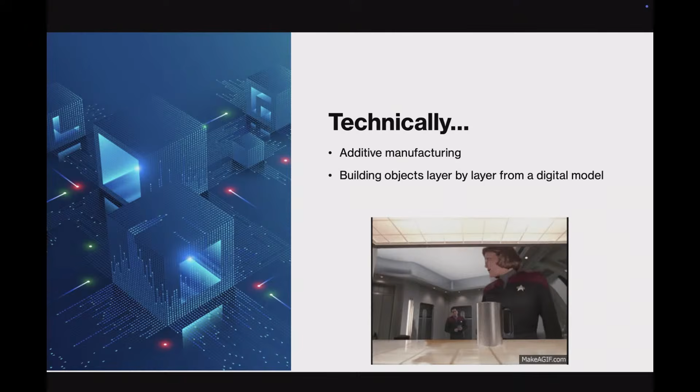I don't have the examples up here, but you can go look up NASA's plans for a pizza 3D printer. You can also look up a Kickstarter that succeeded, shipped to about 2,000 people back in 2013, for a pancake 3D printer. It would make whatever shapes you want on a hot bed, then flip it over and you've got a pancake, whatever complex shape you want.

So a couple of other terms I want you guys to familiarize yourselves with if you're not familiar: SLA, stereolithography, SLS, selective laser sintering, and FDM, fused deposition modeling.

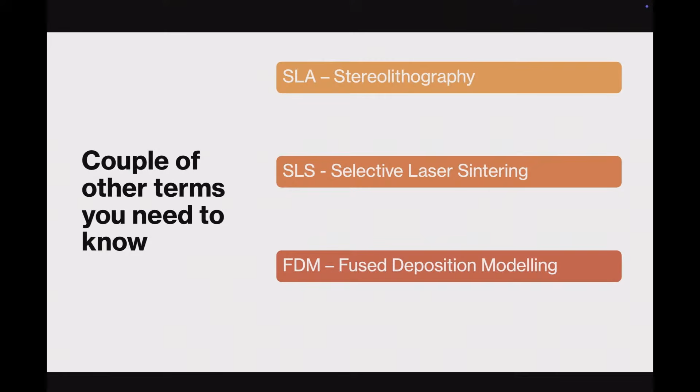Now I'm going to tell you the same thing I tell my students: in science we like to use fancy words. Stereolithography, three-dimensional light writing, literally translated from Latin.

Selective laser sintering is using lasers to selectively melt and fuse things. So stereolithography is when you use resin, liquid, and cure it into a solid using UV. The cheap way is to take a screen, put a black mask on it, only open up the mask where you want light to come through in the shape you want, shine UV, and you've got hardened stuff in that shape. The fancy way is to have a laser trace it. I don't have the money for one that actually traces lasers, so I only have the one that does the UV screen.

SLS is super fancy. You get a bed of powder, usually nylon. A laser goes through in 3 dimensions, reflected using a whole series of mirrors, and builds a 3D model inside that bed of nylon. You can do incredible things with it.

Is this out of a solid thing? No, imagine a giant vat filled with nylon powder, and you've got a laser going in with mirrors all around it, pushing the beam to exactly where it needs to go. It reaches focus at one particular point where it melts the nylon and hardens it. So there's a big block of solid stuff you're melting inside? No, it's powder. Laser it to make it. So how's a laser getting through the powder to melt the focused bit, not the outside bit? You get a top layer, but then it pushes another layer of powder over it.

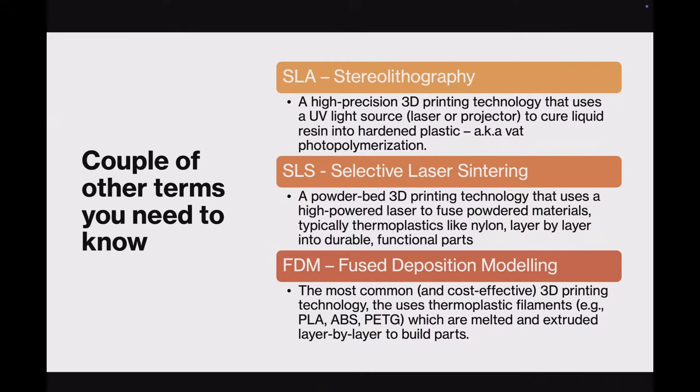And FDM, which is what everyone uses, melts a piece of plastic, a string of plastic, and draws lines with it.

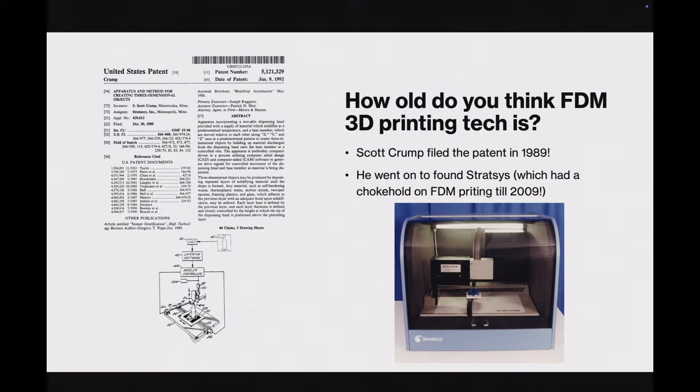So advanced, yet it's so far back in time. That patent didn't expire till 2009, which is why printers didn't turn up until then. While I was working on this presentation, I went to look at the history of 3D printing and realized I'd been in 3D printing from one year after the patent expired.

That made me feel old. So was there an explosion of 3D printers after? Absolute explosion. There's people waiting for that to expire just to go jump on it. So it's been held back all that time. You can blame Stratasys for it - well, they invented it, but didn't do much with it.

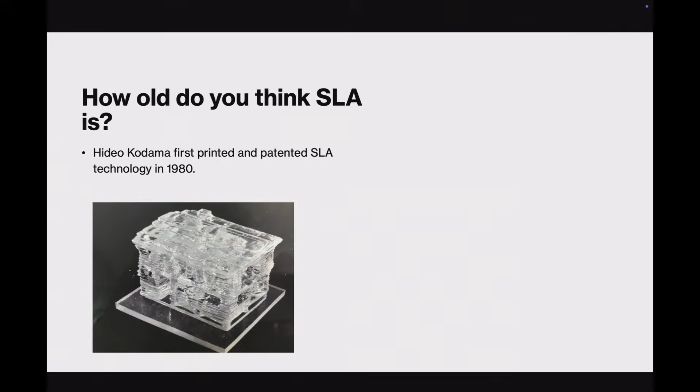Each of those layers is 2 millimeters thick. That is positively gigantic, just slapped it, just clear resin. 1984 was when Chuck Hull patented what we recognize today as SLA.

And once again, not much has changed. The reason being, all these patents expired fairly recently, so any changes have only happened in the last 15 years or so.

Since you just said after 2009, was there an explosion? Welcome to the first major Kickstarter for 3D printing.

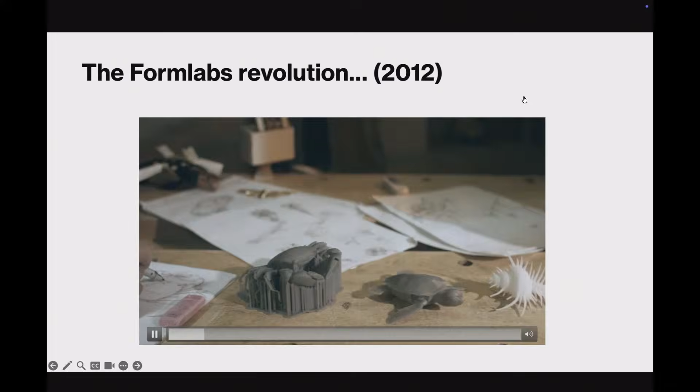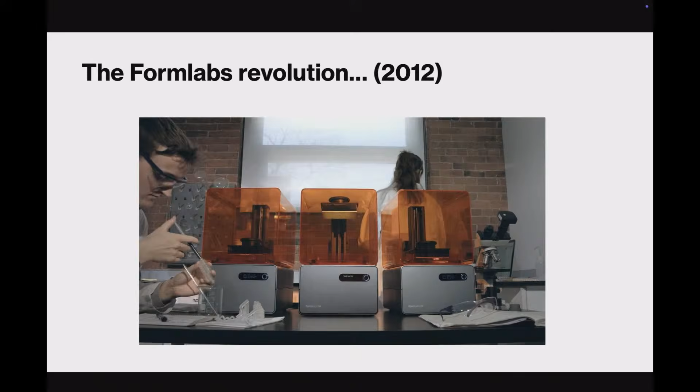All right, so you can see that was what the Formlabs one was about. You'll recognize the same shape here, just slightly different. They advertised clear resin, which we know now is painful to work with - it's much easier to work with boring grey resin. And actually nothing much has changed in what they talk about.

So you basically get a UV laser that gets reflected around. Like a laser printer? Yep, but in 3D.

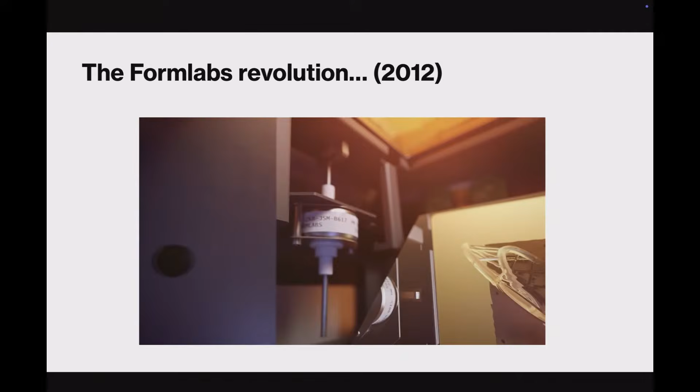And it punches through and hardens some resin. So Praj, where that's hardening the resin, it's not necessarily the surface of the resin bed, is it? The surface of the resin fluid, is it? Glad you asked, I've got show and tell.

That's your resin bed. That is what connects up to the vat here, looks like a mirror. That slowly pulls it, so that rises out of the resin.

The resin sits in there. Notice it's got that lovely clear thing down the bottom - it's called a FEP. The screen down the bottom has the mask and the UV light coming through. So that's just an LCD screen or something? That's just an LCD screen, yeah. The light source is UV.

That's about it. This basically drops in, once the first layer hardens it lifts up, goes back in, this time just 0.1 mm higher. And the next layer hardens, pulls out, goes back in, another 0.1 mm higher than previously. That's super cool. And the plastic down the bottom goes twang, twang with every peel because you're basically suctioning the thing off.

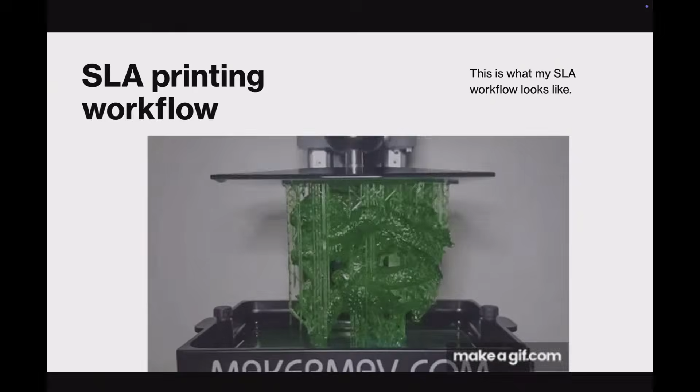Wow, that is basically how the printer works. Not that quick though - that's a time lapse.

Are there health issues with resin? We'll talk about that in a minute. I've actually got a friend and colleague stepping in for that, because the kind of 3D printing I do with resin is mostly artistic - I build models that sit on a shelf and I paint them. I'm a molecular biologist, I've learned.

I learned fine motor control skills to inject DNA into cells - don't do that anymore, so now I paint miniatures. But my colleague Rob, former colleague, will come in - he builds functional things out of resin, and I think that's super cool because resin's incredible when you do functional stuff with it. Now if you're wondering what on earth that sort of stuff coming off the model is, if you suspend something...

Where's my... oh no, that's all good.

He's got the book. Since we're in Tasmania, I thought I'd print a thylacine skull.

So this isn't going to attach itself to that? No, you have supports that are built onto the plate and the whole structure hangs off it. This is a failed print - you can see the back of the skull looks really weird. But there's a reason I brought it along, I'll talk about it in a minute. That's the support system the whole skull hangs off when you print.

So that's my current SLA printer, not this one. This was the printer I started with. I picked this one up in 2022 for the grand sum of 489 Australian dollars. In 2012 it was 3,600 US. In 2022, 489 Australian - you can pick this up for about 300 Australian when it goes on sale at the moment.

And it's actually a slightly better version that you pick up now, because this one they call the Mars Pro now. This one is a lot fancier, so I'll look at the difference.

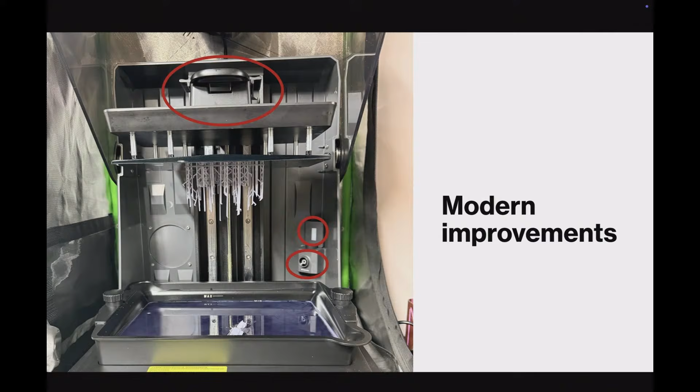Which causes problems because they cheaped out and put in a full spectrum white LED in there. UV cures resin, so you leave the light on for too long and you get a nice little skin of cured resin on top. Gotta be careful.

This one runs off a single rail, this one twin rails - a lot more stable. It's even got a little vent in the back to attach an exhaust fan to and suck all the fumes out because resin's nasty. Rob will talk more about it, but resin is nasty.

Now, one other thing is an absolute blessing - I want you to take a look at the state of that lid. That's from me picking up the lid every time I printed with gloves that had resin on them. That's now cured, I've hit it with UV so it's all hardened. But every time you take a print off, you've got to take the lid off, find some place to put it, and then deal with the mess. This one just tilts the lid back. Personally, that's my favorite improvement.

And then this is the coolest thing. Resin printing is chemistry - resins work best at a certain temperature. So I don't have the setup here, but what I used to do with this was a beer brewer's vat heater, the belt. Strap the belt around there, connect up one of those Inkbird thermocouples, that's what the Blu Tack was for. Put the lid on and it'd just turn on till the temperature got to 25 degrees - for the air temperature to get to 25, that'd be at 28, which is just perfect for printing.

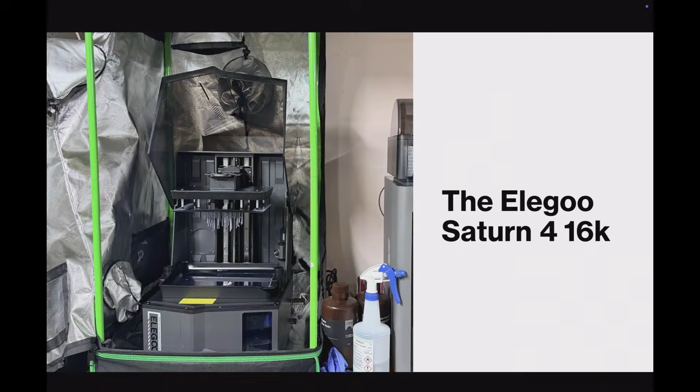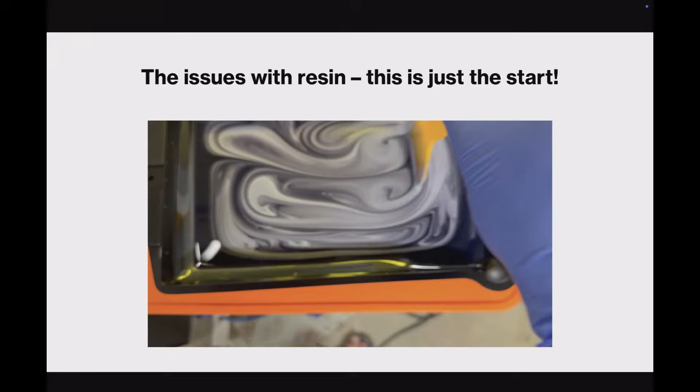So, once we move past the cool bits, here's a problem with resin. I left that sitting for a week in the vat - it separates. So you actually get in there and give it a nice stir. If it's this printer, my new fancy one does the mixing so I don't have to worry about it, this is just a demo. But resin separates in bottles too - if you don't give it a proper shake, you're going to end up with the compounds all over the place, which means your product's not going to be what you want it to be.

And then there's the mess of having to wash it after it comes out, and you've got to cure it. You need a silicone mat, because anything else will just absorb the resin. Resin can give you super detailed prints, but it's super messy.

Super, super messy. That, by the way, is the not-yet-assembled version of Sauron the Dark Lord. I was going to say Sauron's helmet. Yeah, reaching out, one ring glowing on the finger, mace in the other hand. Cool, gonna have to assemble it.

Now, I got that because I got it on sale. You don't need to get the fancy thing. You can literally get a Bunnings bucket, put a strip of UV LEDs inside, turn it on, put the thing inside, put the lid on, you're done. The wash station doesn't need to be that fancy either. Rob will talk to you about what he did - he doesn't have the fancy wash and cure station, and it works just as well.

Fair warning, I only work with pretty prints that I paint, so I use water washable resin. My life is a lot easier than Rob's - he's a miniature railway builder and leaves things outside, exposed to the elements, so he's got to use completely different techniques to work with it.

So what resin boils down to is: resin's messy, resin's toxic - I kid you not, an actual carcinogenic toxin - and resin's a pain to clean up. It's sticky, it leaves a mess behind.

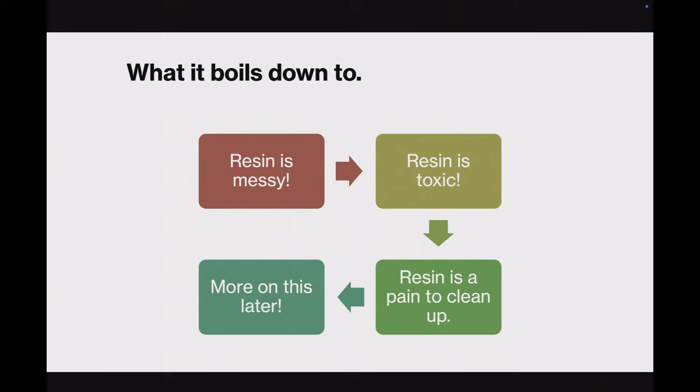Once it's solid, it's not toxic, is it? It isn't, but you've got to be very careful about making sure it's properly cured. In the early days of resin printing, I walked away with a print I thought was perfectly cured, left it sitting on a countertop, came back to it a week later - it liquefies. But we'll leave that to later.

Quick thing at SLS printing - once again, you're going to see another familiar name here. Space Launch System, just went to the moon. Design and manufacturing workflows are closer together than ever.

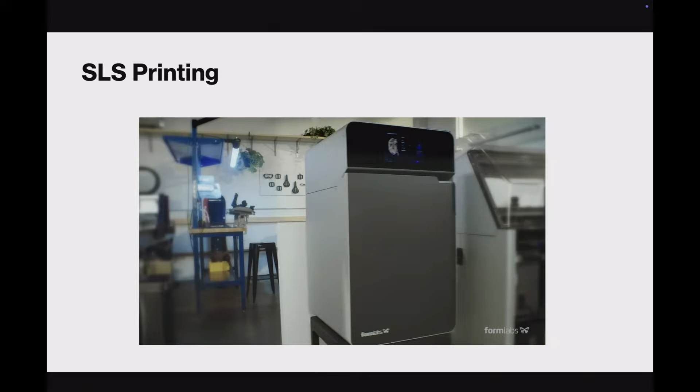But our ideas still often exceed what we can physically realize. A new wave of independent manufacturing starts now with the Fuse 1, an affordable, compact SLS 3D printer with an intuitive workflow. Selective laser sintering, or SLS 3D printing, is relied on for printing strong, functional nylon parts. In the past, SLS has been too expensive and difficult to use for many businesses. The Fuse 1 allows you to fabricate production-ready parts and high-performance prototypes, controlling your entire process from iterating on your first concept design to manufacturing finished products.

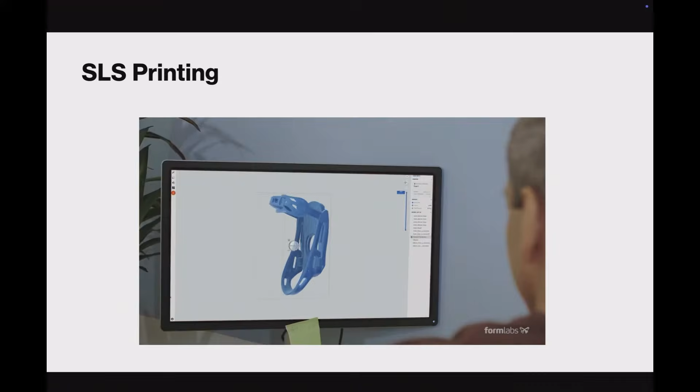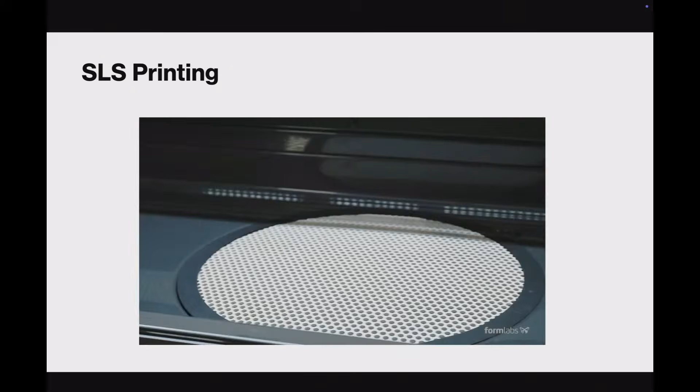The process starts in Preform, our print preparation software. Preform's part packing algorithms can automatically arrange many models in a build. During setup and printing, the Touch UI walks you through every step. Monitor your print from the touchscreen or from your computer via the integrated live camera. Once your print is complete, transfer the build chamber to the Fuse Sift - this safe, efficient powder recovery station completes the workflow. Fuse Sift will automatically dispense and mix used and new powder after you set the ratio.

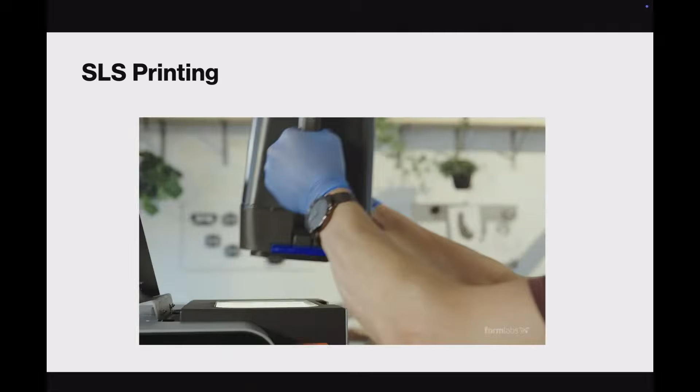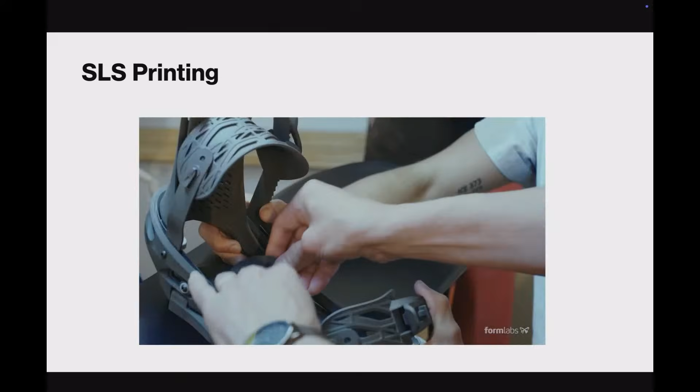Reduce waste by recycling powder at a 30% material refresh rate - this means you can print with up to 70% recycled powder. After you've transferred a completed build to Fuse Sift, swap out the entire build chamber from the Fuse 1 for non-stop printing. SLS 3D printing fuses nylon powder layer by layer. The unused powder supports the parts during printing, so you can create complex, interconnecting designs with no need for support structures. Nylon parts balance strength, flexibility, and detail, so prints are ready for rigorous functional testing or to ship ready-to-use products to customers. It's time to rethink product development and take control of your own manufacturing. The Fuse 1: Production SLS, finally within reach.

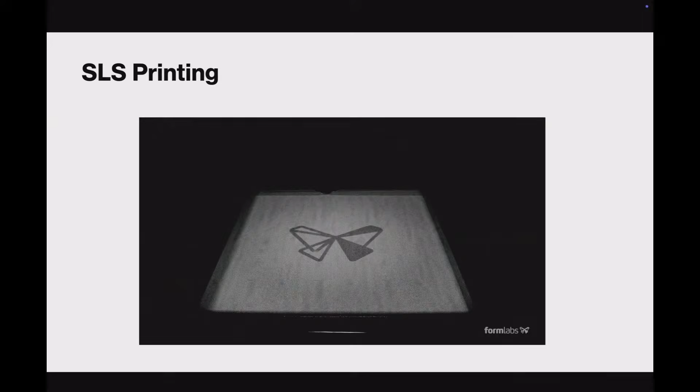You'll notice that at no point did they mention a cost. If you're going to ask, you can't afford it. I'll give you a clue: the nylon powder alone costs $100 a kilo.

Affordable SLS 3D printing is, if you want the entire package - the printer, the sifter, the reclaimer - about 140,000 US. That is cheap by what they used to be; they used to cost more. Can we put that on the committee for next year, please?

It's amazing how quick 3D printing is actually moving along. That's a standard FDM print - printers have just gotten that good. This is on a printer that was released in October last year. Looks like a handkerchief.

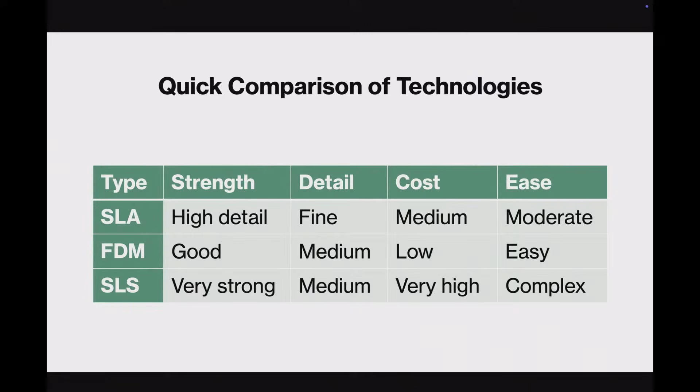Here's a fun little project I did to fool a whole heap of second year evolution students. I printed the bones at a quarter life size - the bones of a horse, a lizard, a bearded dragon's skull, and a set of bat wings, put them all together with their archaeological fossils, and put a little official nameplate calling it Ignis Fatuus, which literally means foolish flame. You'd be surprised at the number of second years who very carefully wrote the name down and moved along, thinking 'oh yes, here's a specimen we've looked up.' Feel free to check them out - that's really delicate bone, but it's printed.

I feel like that was echoes of what they thought happened with the platypus - yeah, they thought it was a fake. Oh my gosh, wow, what's it called? Ignis Fatuus - foolish flame. And the attention to detail on that scale too is absolutely magnificent.

So, AI now - I'm glad you said that because Rob is going to talk about that. That is amazing, it just gets scarier and scarier.

By the way guys, at the end of today's talk, the Tassie Devil skull that's floating around - well, crack it open, because that's from a CT scan, so the internal structure of the print is the internal structure of the actual skull. We 3D printed a wombat skull at one point at work, printed it out, looked at the teeth and went 'did the printer fail?' No, it turns out the wombat had poor teeth. Then we realized this is a CT scan of a living wombat running around in Lone Pine, so word got sent back saying your wombat's got dental problems.

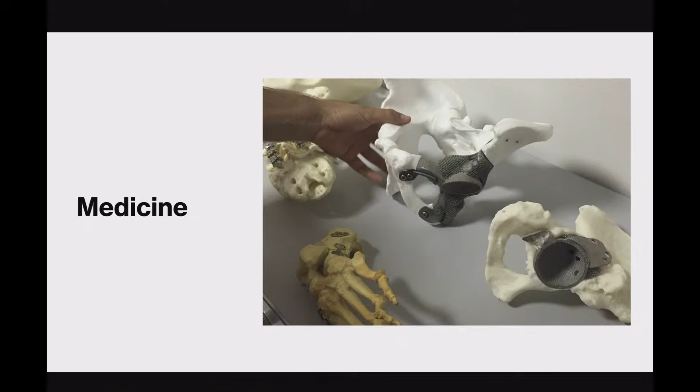And what's the printed surface like - is it such that you don't have to do anything to it? Yes, when I looked this up I found four papers published in the last year talking about making the titanium porous to let nerves, bone, and blood vessels grow through it. That's why it's not just a solid chunk of titanium.

You can print soft materials too - prosthetics, especially for soldiers who've lost body parts, maxillofacial replacements. You can rebuild a face from their facial scans. Amazing. Could they pick their own nose?

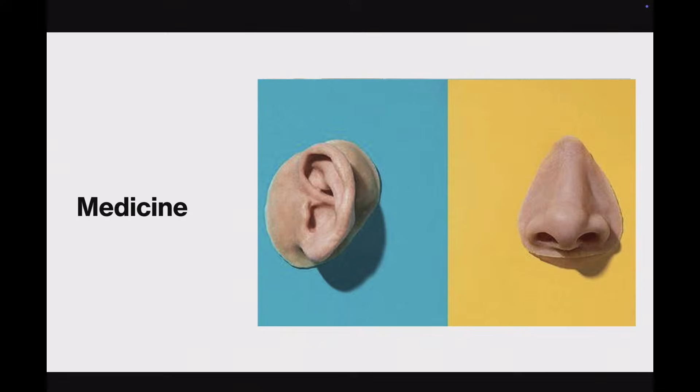And then I bumped into this paper, which is about what we think we'll be able to do in the future. It's a fascinating read - I'll put the link up on Discord.

3D printing organs is, from my understanding, about a decade away. As in, we can do that in the lab now - we can build lattices that build an organ around it. But just getting it to a position where you can actually implant those organs into people is the hard part.

What's the material they use? It's obviously some sort of organic material - usually an organic biodegradable plastic. Sometimes cellulose is used. My favourite is where they use sugar - they've spun heart structures out of sugar, 3D printed in sugar, and the heart muscles eat it. They create a lattice, put your cells in it, and it rebuilds a heart.

This isn't stem cell stuff. No - if you want stem cell stuff, there's a whole other thing happening out there with actually printing with cells, which is a completely different story. You actually layer cells.

That is amazing, and that's just medicine. We all know CSIRO invented Wi-Fi - yeah, CSIRO also made the first 3D printed jet engine back in 2015. Wow. That was on display at the Avalon Air Show.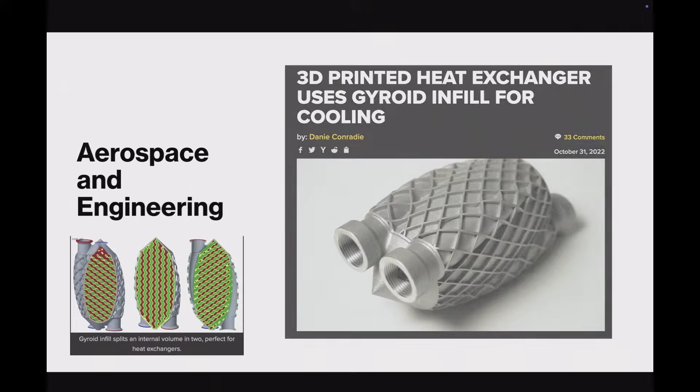The other cool thing is 3D printing ceramics. Oh wow, so now you're talking about materials that can tolerate excess of 3,000 degrees. Absolutely, so you put that into machine equipment that needs that kind of thermal tolerance. You 3D print it.

So Marcel, Ruby can try this out. Marcel's wife is a ceramics artist. Right, so sorry, I'm going to ask a question.

So how the heck do they print something at 3,000 degrees Celsius when lasers are hotter? You print with clay, you hit it with laser, and then you fire - you fire each layer. So it's literally you're basically printing with soft clay and then hardening it. You're firing it in a way that the clay isn't fully hardened up top, because the next layer should adhere to it.

And then there's material science. I had a good chuckle at the last talk I was listening to on YouTube, and I went, yeah, I'm going to have to talk about this. So, Justin, for the helmet, you can 3D print lattices.

Anyone here who's been in the armed forces? I can tell you that the foam in the helmets is horrendous, sweaty. It absorbs all your sweat, and then it sits heavier and heavier on there. You can 3D print a lattice that's been shown to be up to 10 times more efficient at reducing impact, while being hugely lighter. There's barely any material there - it's cooling and more breathable as well.

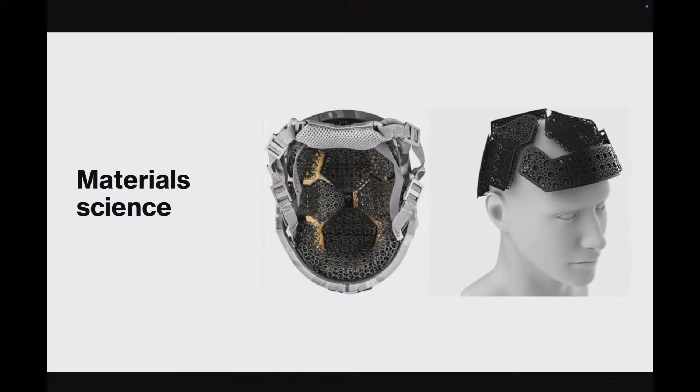I've got something better. For anyone who's got a 3D printer and doesn't have the money to buy one of those because you've spent your money on the 3D printer, that's available for make at home for free. I kid you not, it takes my body weight, works as a really good summer sandal. TPU again - sounds like a Michael Jordan type of thing. Prints in TPU, so it's actually dead cheap because a roll of TPU is $53, that's about a kilo. These weigh 83 grams each, so you just print another pair when you wear it out. And how hard wearing are they? Is it TPU? Like that's TPU.

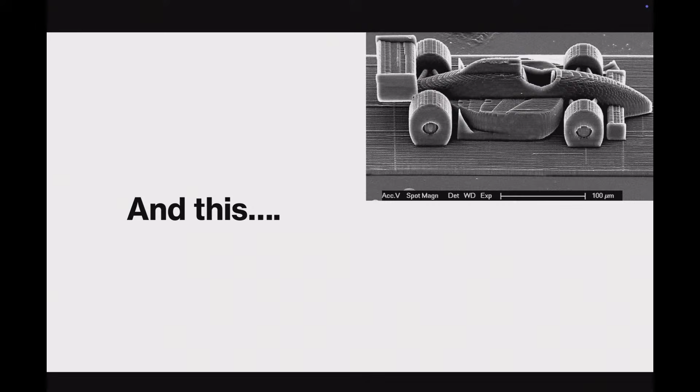So presumably that's under a scanning microscope, I'm guessing. So the reason I'm showing you guys this is the jet equipment materials that you print, the structures and apparatus you print - you can actually shape them at a micrometer scale to give you the highest efficiency, break up the wind coming, break up the turbulence.

I'm just happy, guys, that I can actually print and paint that at home. So that's come off the Saturn 6, you can see a few layers there.

Yeah, that's fantastic. Thanks. So Praj, how long did that take? How high is that, about that scale? And how long did it take to print? The entire thing, about 22 hours. Okay, and it's mostly hollow.

How much support structure was on that? Quite a bit, yes - look at the detail. Damn right. So the most interesting thing - do you have nightmares?

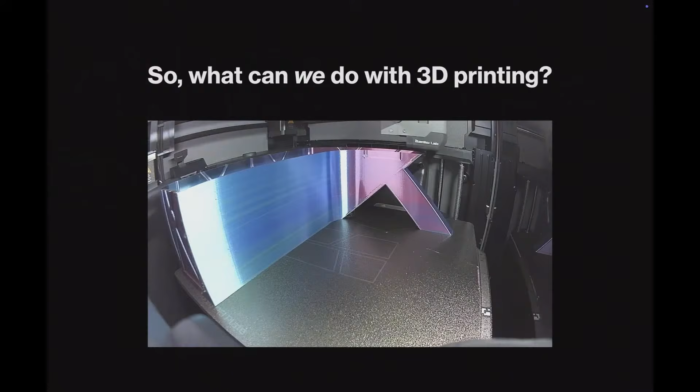I've got some weird things printed out at home. So that is all the stuff that fancy companies out there can do. That's what my printer at home can do with 3D printing. And you'll notice that there's not a support in sight.

45-degree angle. By the way, if you're wondering what that is, this little thing back here is what's called a poop chute for that printer. It pushes any waste filament out through the back, but the company, in a cost-saving measure, didn't provide a way to catch something coming out of that poop chute - it just pushes it straight out onto the table. So this opening goes in behind that, and it catches it, wraps it around the printer, brings it forward so I can pick up the stuff.

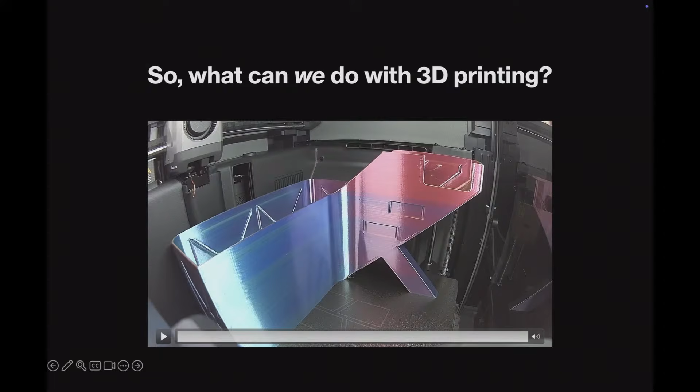I love it. Praj, I noticed there was a Bambu Lab thing - what model Bambu was that one? P2S. So, a very short history of 3D printing, guys, because I'll be switching to Rob in a minute.

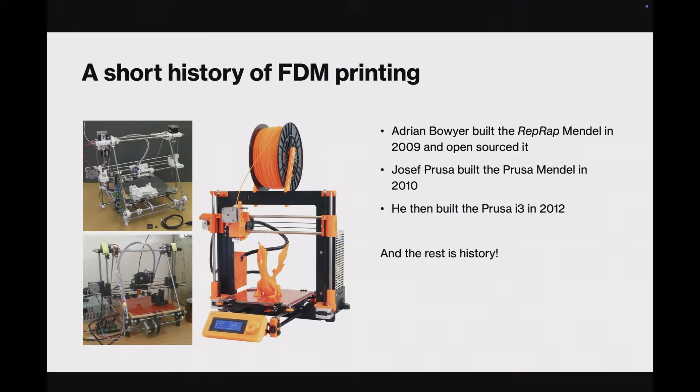That was the first FDM machine that came out after the patents lapsed. And then Josef Prusa went and built the Prusa Mendel, which Rob is going to show you because he's got an original Prusa Mendel. And then he built the i3, which became history. Now, in terms of my personal history, my history with 3D printing started there.

Great idea, terribly executed, because the beds were not level. Like a lot of Kickstarters.

Then I got a FlashForge Creator Pro in 2016. In between that, I was playing around in the Brisbane hackerspace with a whole heap of Mendels. This was my workhorse for many years. It has two extruders, so it can print two different materials.

Here's a failed print from that. You can see the support structure is white PLA, and the actual material is wood. It's wood filament, so I can polish that up, stain it, do whatever I want.

That's amazing. Wood. Yeah.

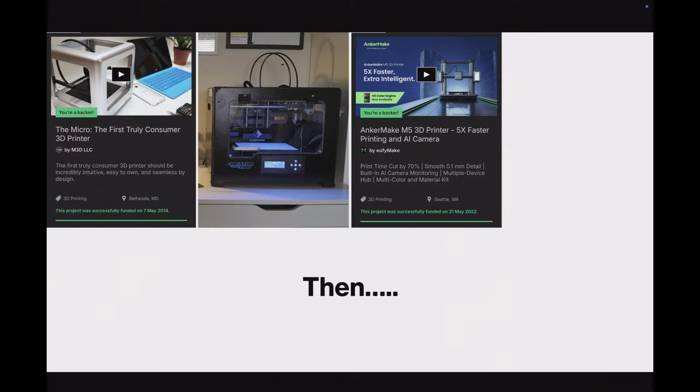So, fun story, Justin. When we started talking, I sent you those pictures of prints saying I'm starting to print. This thing, I turned it on, typed a few commands in, and it went thermal runaway. Okay, what do I do? I've been talking to Kiri about this for about a year before that, going, I'm not sure how long this printer is going to last, and I'm not sure if I can get a replacement.

Well, she was okay with me going and buying the Bambu Labs P2S. Now, for the first time, I've got a printer that actively swaps filaments, prints in different colors, embeds things, does super cool stuff. And as someone who started working with Mendels, where every nut and bolt had to be tightened to make sure your first layer is perfectly flat - we'll talk about that more.

This thing, I plugged in, I turned on, it leveled itself - 128 points of leveling. It then ran a sound check to see how the motors sounded in the space, retuned its motors so it didn't sound too bad. Then ran a vibration check, because when it does squiggly prints, it vibrates super fast. Now it has a compensation algorithm that it's built for itself because it's sitting on a slightly wobbly table.

And I'm going, I don't feel like I'm 3D printing anymore - I'm pushing a button and it works. And I assume all those filament rolls are in a heated enclosure - they're in a heated thing. The things up here are 3D printed, they're filled with silica gel. I've got a hygrometer there.

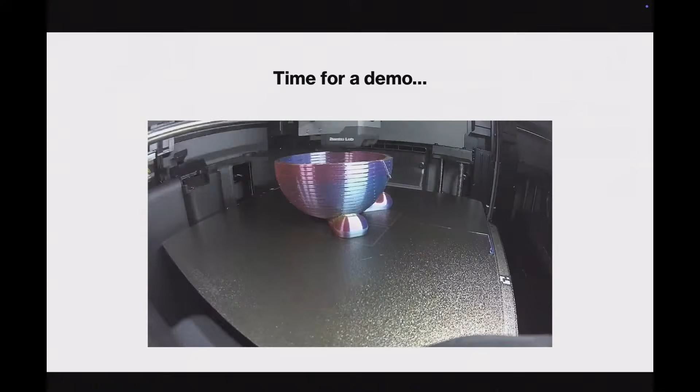I printed this - I didn't bring it, it was too big. I'm going to use it with my students. It's a giant Easter bunny. But it should be a bilby. Should have been a bilby. I agree, couldn't find one.

Very shiny chocolate. So, this brings me to - I was looking at the 3D printing channel on Discord. Lisa was asking for a modified print that would actually fit the battery that she's got. So I went, okay, let's try this.

I'll wait for the bunny's ears to finish. What's the time duration of this? Right, that was a 17-hour print. Because that is a free spiral, you can actually pull it open.

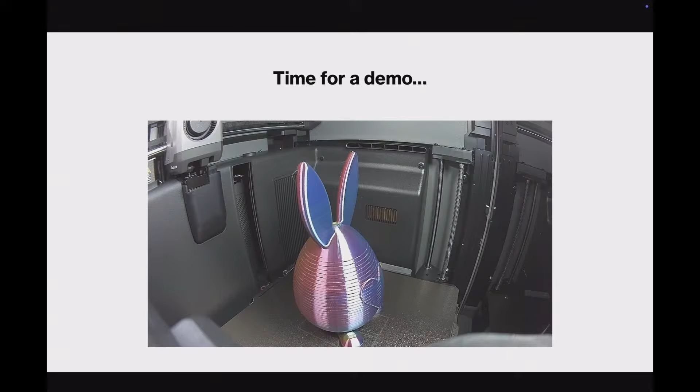So let's go to demo mode. I downloaded the file that Lisa pointed out - hang on a second, there we go, 3D printing. Let's go back. That was the one. I pulled it down, and she'd said that the battery was a 6066 - 60 millimeters by 66. So pick it up.

That's the thing. Now, guys, fiddling with an STL and trying to reshape it is painful - it's easier to do it from scratch. When I showed what I was doing to Rob, he went, 'Oh, I'll spin this one up in Tinkercad.' So he'll talk to you about that in a minute.

But if your files have a .f3d extension - how many of you here are connected to a university in one way, shape, or form? Yeah, you have a .edu.au license email.

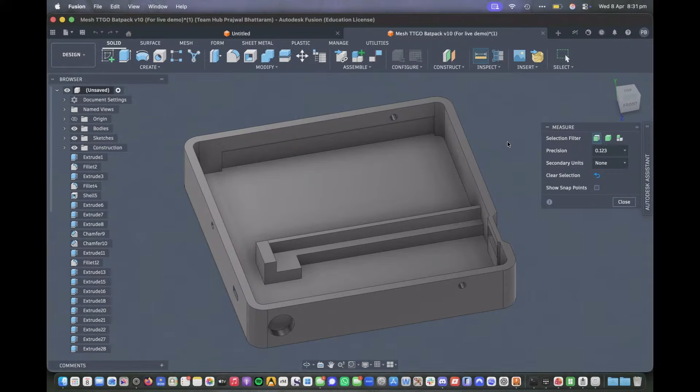So if we go the other way and look at the depth there, that happens to be only 351, so 35.1 mil. We need that to get up to 66.

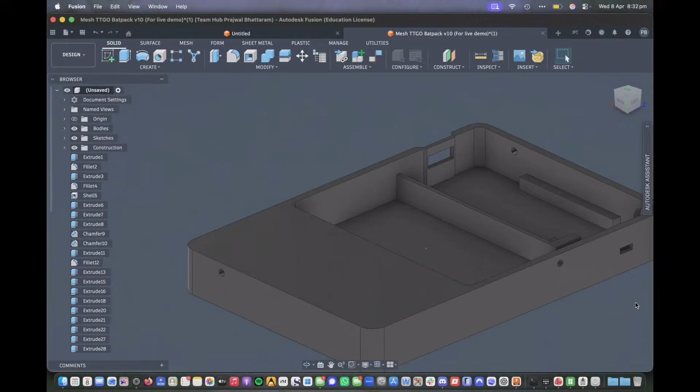So what I'm going to do, very simply, this is the cool thing: I select the face, right-click it, and move the face. I grab the arrow that points in that plane, pull it out, and tell it, because we're going from 351 to 660, I'd like it to go up by 315 mil, give or take a millimeter. So suddenly I've got a very big chin on the thing.

Here's another cool trick. Because that's a recess, I can grab that, tell it to extrude. Extrude literally means take a 2D shape, pull it up to be 3D, but it also means take a 2D shape and punch it in to be 3D. So I can grab that arrow and tell it to go in -315.

I've got my slot. Then I'm going to grab that, ask it to move. It's just a flat face, not an embedded thing. I'm going to grab that arrow again, so I get that, and then go -315.

We're done. Lisa, this is why I said it, don't need to worry about it. That's how quick it was to modify it. You made that look too easy.

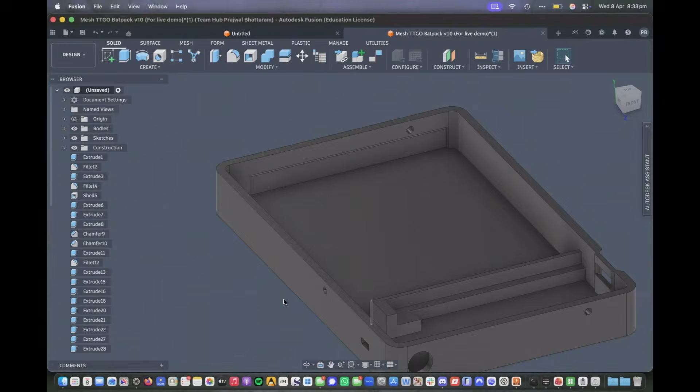So once you've got this, all you do is go File, go to 3D Print, not to export. Sounds logical to say export, but nope, 3D Print. You've got to divide it by 10, don't you? I'll show you that in a second. Grab the object, say OK.

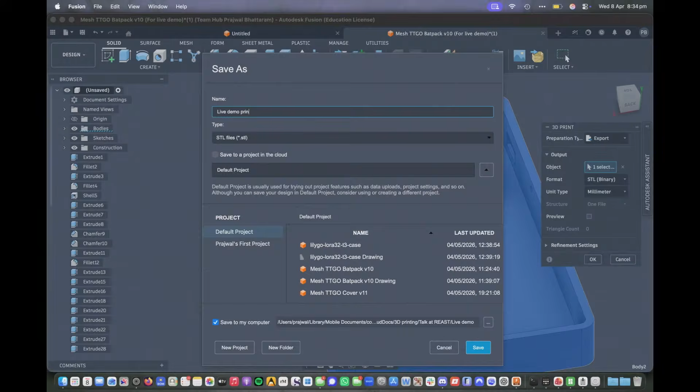I'm going to pop it in the same folder as the other one, which is... where did I put it now? Oh, 3D printing, there we go. Look at Reast, live demo, and I'm going to call it live demo print. There's a reason I'm calling it live demo print. Okay, that's done, we can close Fusion.

Now, that's about as easy as it gets. Keep poking around with it. If something breaks, Command Z, Control Z, it'll fix the issue for you.

Now, once you've got that, I'm going to fire up my slicer. By the way, guys, I've got Tailscale installed at home, so give it a second, it will link through. There's my printer in Brisbane.

Right, so I'm going to pop into the prepare mode where I've set it up, with its poo shoot. Thanks, Greg. Poo somewhere, Greg. Yeah, 3D printed, custom made poo shoot.

Poo somewhere. As you pointed out, as soon as I drop that on the bed, that bed is 256. Yeah, print that, go for it. Hit go.

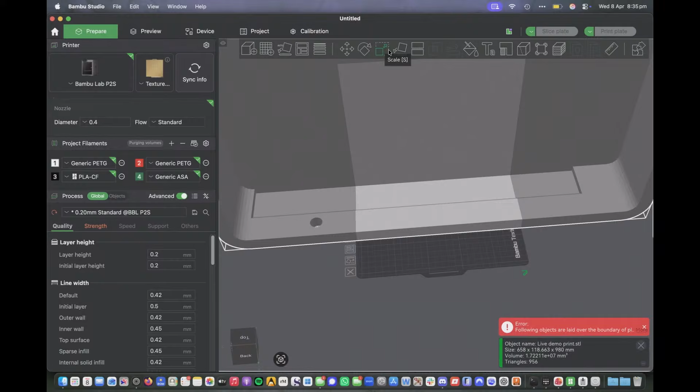Houston, we have a problem. Watch the filament go, I love the error. It's too big, you think? You select that, you scale it, and because it's a factor of 10, I'm not even going to bother with the 100, I'm just going to take out the decimal point and move it one step, and suddenly we're back down to size.

Okay, now with this one, what I'm going to do is tell it I want it flat on its back, because if I flip it the other way around, this section's going to print on thin air, not what we want. We're going to set that up.

Hey, look, it's got my filament set up with colors. So are you slicing now? I am, I'm going to show you how it works. So I'm going to tell this thing that I would like it to print in a filament called... nah, I want carbon fiber. I'll print in carbon fiber. Oh wow. So I'm going to tell it to print using carbon fiber, the PLA infused with carbon fiber. This is where it gets cool.

So for quality, you can set your layer height. The finer your layer height, the longer it takes to print, but the cleaner your print looks. There are tricks to fix that, but most of these I tend to leave as they are. The only thing I would change if I were making a pretty print is the seam.

A circle has to start somewhere. It usually lines them all up, so you get this little nubby section where the seam of the print is - that's when it's aligned. I could randomize it so for each layer I'd get a different seam point, but it just takes longer. Given that this is a functional print, that's all good.

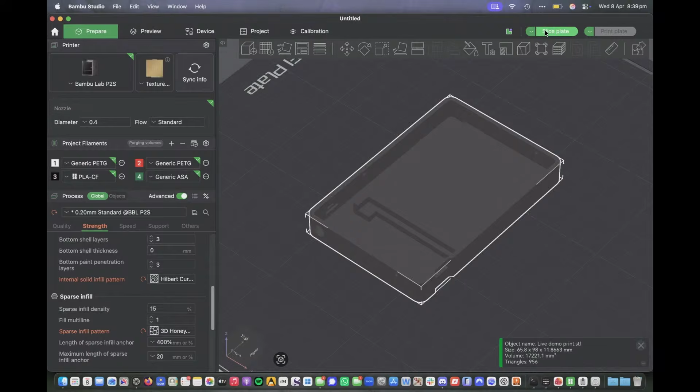So I'm going to put that in there. I'm going to tell it to slice the plate. Slice the plate - what has it done?

So inside that empty box, can you see the bottom layer? It's actually a cross hatch, it's not straight lines anymore. So it's going to print that first.

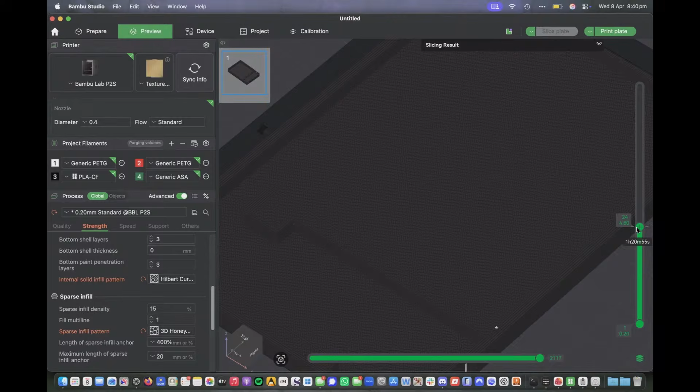And then it's going to start printing layers over it. Would that take a lot longer than straight lines? It does. And the walls are straight lines though - is that only for one layer, or 0.2 millimeters? 0.2, yeah. The double line. So it prints it all the way up, finishes off the top of the wall with the same sort of print.

Now this is where the magic happens. I hit print, and I'm telling it send it - off it goes through the cloud.

Print is on - is that a fork of it? He's going to pull one out from his bag, basically identical to mine. He's going to magically transport it from there to here - because he didn't save the file. He doesn't save it. It's printing.

Oh, there you go. Watch the print head - it's cooling the chamber, it's moving the plate around. Wow, it's actually homing itself, figuring out where it is in space.

It's doing its calibration. Does it run through a bed level as well before it starts? It will do a bed level in a minute. Do you have any problems with the model adhering to the plate? Not with that plate - we'll talk about that.

We have all sorts of issues at the shed - Rob's going to talk about masking tape. Did you put in a colour request, Lisa? You're getting black - carbon fibre. Any colour as long as it's black.

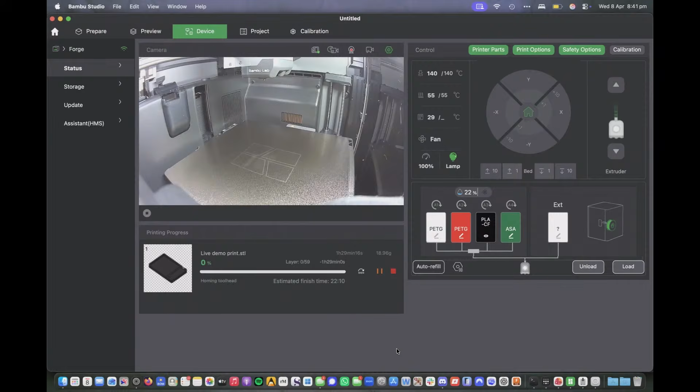Praj, two questions for you. Because this is clearly a functional print for amateur radio, not one of your complex models - how long would you expect this print to take? And the second part of my question: we're watching it getting itself all warmed up and levelling and self-checking at the moment - how long before we expect to see the first layer go down?

7 minutes to the first layer, 1 hour 29 minutes to the whole print being done. Okay, and that's because it's not necessarily as complex as those models that you have. Okay, all right, thank you.

I'm not going to make us sit and watch for 7 minutes - I'll come back to this in a minute. But you can see it's using the poop chute.

It's because he's very proud of his poop chute - it's the first printer I've had that actually does that. You can see it pulling the carbon fiber filament through. Mine does it down the side, as a side entry too. Mine just does it wherever it wants.

All right, while it does its thing, I'm going to start by calling Rob because he's been waiting patiently and I've been blathering away here. It'll take about an hour, and about another 3 weeks till you go back up there and post it back down.

Yeah, well there you go - it's basically flicked the bits off. It's changing the filament across. I'll call Rob in the meantime.

In the old days you had to do all this manually - that's why, like I was telling you last week, it's so much better now. You don't have to do any of this old crap. Some of us still do. The old days - 4 weeks ago. Yeah, that's true too. Hold that thought.

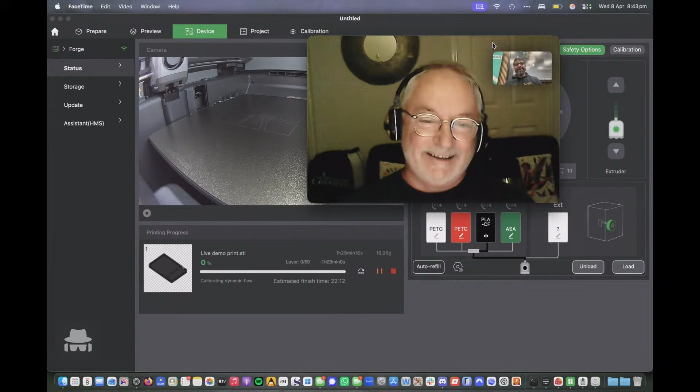All right guys, this is Rob Mackay-Wood. He used to be my boss back at UQ. He's a fellow tinkerer, fellow biologist - he's done firsts of so many things. He hasn't gotten into radio yet, I haven't convinced him to do that yet. We've got a deal for him - we'll set him up with a Baofeng, easy, peanuts. But Rob's been tinkering and building things for a very long time.

E-learning at Sydney Uni - he was one of the people who helped build it, crawling around in spaces running cabling through to get systems to work. Then he came up to Uni of Queensland. I started working as part of his team about a year after he started. At some point I said to him, Rob, if you retire, I'm going to quit. And he retired, and then I quit, and now I'm a school teacher.

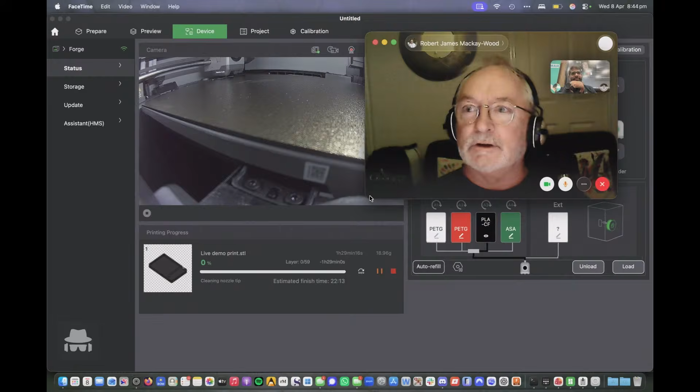I'm a biologist and manager, retired from UQ, UCID, and from Cornell, and I'm an IT nerd like Praj. I self-taught - my first computer was a 1 megabyte Mac, 1986, and it was the top of the range, $5,000. As Praj said, I was an early adopter of the internet, and I actually used Photoshop 1.0.

And I used to build networks around our building. We ran wires from the basement up to the labs on level 4, and then up to the teaching space on level 7 - we snuck them around everywhere.

I'm a lover of all things sciencey, a bit of a tinkerer, I love fixing broken things. One of my other hobbies is fixing old steam engines - toy steam engines. I taught myself how to use a metal lathe, and some of my steam engines are over 100 years old.

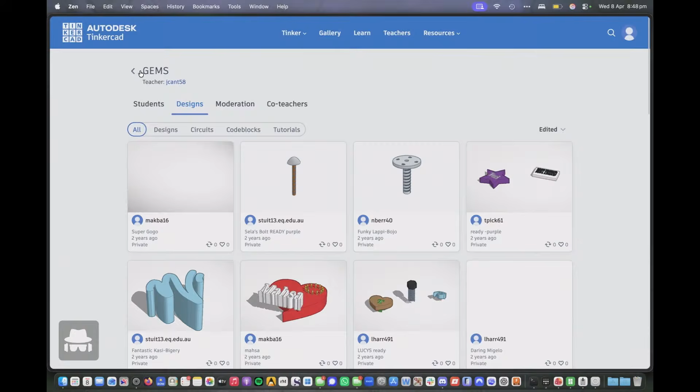And you can do some amazing things on Tinkercad. Now, just to give you a general idea of what you can do in Tinkercad and what you need to think about, got a cube up there.

Now, in this cube, I'm going to pull this out of the way. I'm actually going to delete them so we can restart. That's a cube. I've literally just grabbed the cube, selected the cube. If I want to know the height, I click on that.

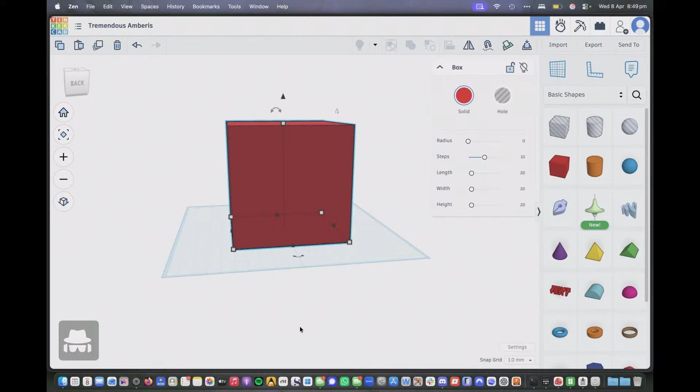Oh no, I'm lifting it off the print bed. No, that's not what I want to do. That is 20 millimeters across, 20 millimeters deep. And if I spin it around, it should tell me. You can tell I'm not very familiar with Tinkercad. You can actually go, yep, that's 20 millimeters high.

With 3D design, the way you think about design is addition and subtraction. That is a cube, a solid cube, 20 by 20 by 20. I grab a solid hole. This will make sense. There's a hole, I pop it in there.

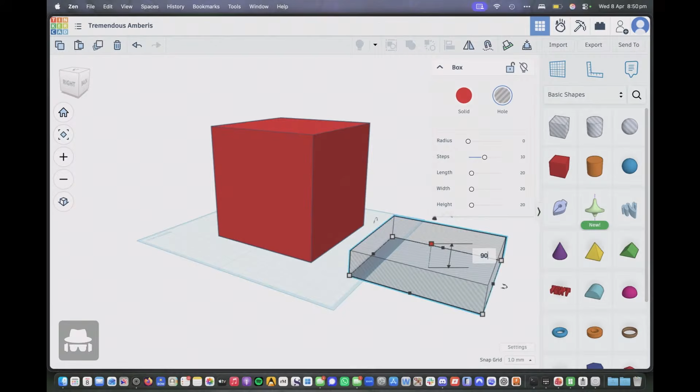Now let's say I want to make that a hollow cube that's got 10 mil thick pillars on each side. I literally just go 90. Make them 5 mil, won't it? And I've basically got something that's 5 mil on each side. Now, to get it off the floor, I can grab that arrow and pull it up 5 mil.

Now, given I said I'm going to do something that's 10 mil, I'm going to change the size very quickly, make it 80 by 80 by 80.

Now, if I pop that in there, there's no way I can see it. I don't know that it's in there. Make my life easier, I'm going to make one side 120. So I'm going to slide that through. And then I'm going to lift it 10 mil off the bed.

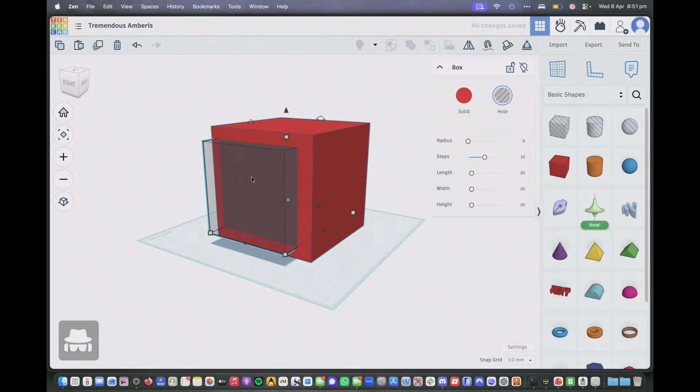I'm going to copy that, paste it, spin it around 90 degrees, basically go minus 90, push it through. Now I'm being very approximate here. Grab the same thing. This time I'm going to spin it 90 degrees the other way. Come on. There we go. And pop it in there.

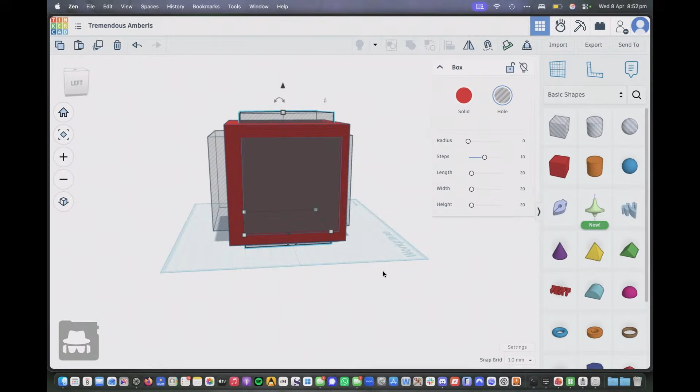This one is going to have to go through a little deeper. Just make sure that whatever you're doing is actually centered. Select everything, group. I just sort of eyeballed it, so I actually ended up missing a bit at the back. You can see I've cut the back off. But it's literally me just inserting shapes into shapes and subtracting a hole from it. It's positive and negative space.

That's about it. You want to build a wheel and an axle?

So I have a question just specifically about Tinkercad, because the last time I did an engineering drawing was 30 years ago, and there was a grey lead pencil and more erasers. Yep, lots of erasers. In fact, lots of erasers. For someone if was going to venture down this rabbit hole, and I know AutoCAD's very, very complex but also very powerful, would Tinkercad be a good starting point?

It is, and I'm really glad you asked that question, because I'm going to flip back to Rob, who has done that exact thing. He started playing around with Tinkercad. I've shown you a very rough, I'm not a 3D designer, guys, I'm putting it out there. Rob is. Okay, Rob, all yours. Okay, have you got me back again? I've shown you. Yes. Okay, so Praj, you're a real noob on that. Yep, I know.

Could do better, just laying out the inside. That's why I've got him up there. C minus, would not recommend. That was a bit harsh. Oh no, I'm not a designer, I'm the first person to say that, I'm not a 3D designer. Oh no, you know Fusion. Yeah, and that gave me a pain in the brain, so I much prefer Tinkercad.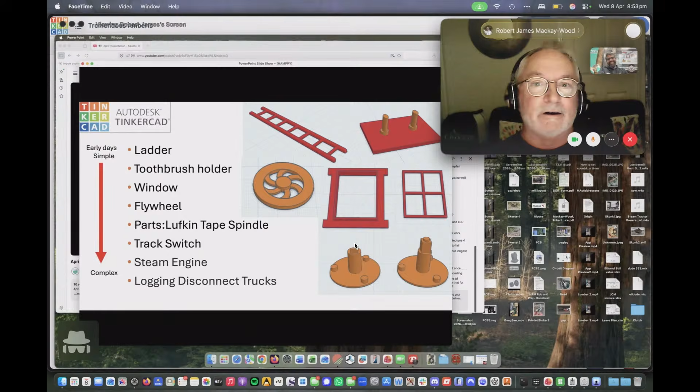One of the first things I ever built was this ladder, for a friend who had a model railway. The next thing was this toothbrush holder for my toothbrushes. I also built buildings on the railway, so I made a window, and I've also made flywheels.

The other thing I was doing at work was making parts for some of our equipment. This item on the bottom right is actually out of a Lufkin tape measure, and it kept breaking when students used to wind it crazily and whack it. So I started printing those up, and because the tapes were about $80 each and that was about 50 cents worth of resin, I did that on a resin printer.

The next few items you'll see in my list are a track switch, a steam engine, and a logging disconnect truck. They are complicated. This is a switching mechanism, and I've got two versions, one for filament and one for resin. The filament one is very basic, printed on a flatbed, so these items are printed on the flat, whereas on the resin one they're mounted upright. This is the mechanism here - it moves backwards and forwards and moves the track.

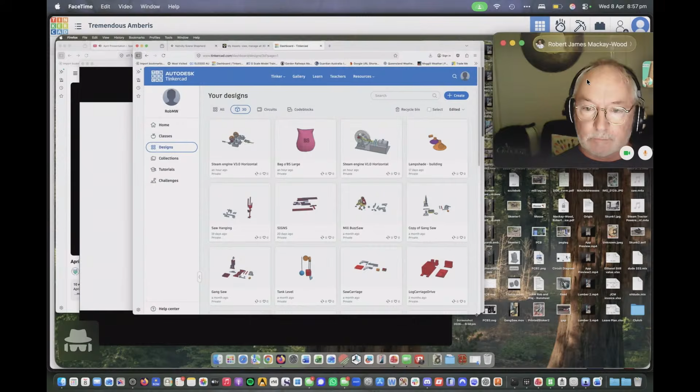So that's pretty much Tinkercad. I'll just flick over to here - these are some of my Tinkercad designs, I've now got 185 of them, all under Autodesk Tinkercad. One thing I'm really worried about is them disappearing one day - I hope that's never going to happen. But yeah, I've got a pile of things on here that I just keep for myself, I don't really sell them for anything.

So pretty much, I think Praj, you're up next again. Yep, thanks Rob. Question - steam engines, did they work? Compressed air? No, but I could. It could work. Thank you.

There's another way of doing this that will actually let you go from 3D printing to working models - we'll come to that in a second. Yeah, it is possible. These were designed, the second one, for my animated lumber mill - that's why I've got holes for bearings in there, and these things will go backwards and forwards, but I don't have pistons, it's just all faked at the moment. But anything's possible in 3D printing.

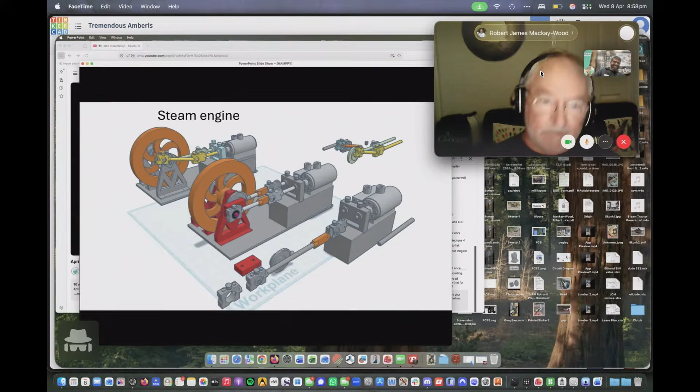One of the other things we were going to talk about is Thingiverse - have you all heard of Thingiverse? Okay, so some of the things that I also sell are these little guys, I'm just going to pull one out of my cupboard. This dude came from Thingiverse, the guy on the left - as you can see he doesn't have a hat and he's also got one leg up. So in Tinkercad, what I did, I chopped one of his legs off, copied the other one, flipped it horizontally, and now he's got 2 legs and he's sitting down.

He's a bit of a lazy bugger, always sitting down - council worker. Oh, he'll be sitting down also. I made him fat and a thin one, because they look a little bit better when they're fatter. Maybe a bit like me.

So yeah, these are some of the things that I like on Thingiverse. This is my collection, mostly figures at the moment. But I'll talk about these guys later because these are AI.

Is everything on Thingiverse free, or do some people sell? It's the license on them - you'll have to look at the license on each item. Yeah, most of them are free.

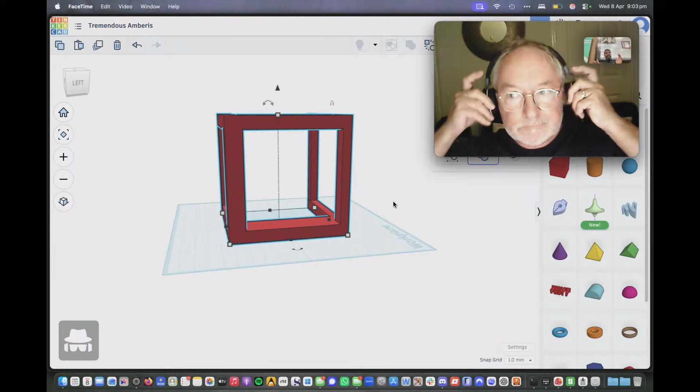Are your kids changing the nozzles to print this carbon fibre stuff? We're just using hardened steel. For everything? Yeah, yeah, right, okay.

So I'm going to pass it back to Rob because he can tell you about how they survive, especially given we're all amateur radio operators - we need something that can survive outdoors. Rob's a specialist at that.

Oh, we lost him. Rob, we've lost you. No sound, no sound. Okay, that better?

Yeah, that's better. As Praj mentioned, a lot of my stuff I build for outside. I started with PLA and it lasted about a couple of weeks. I used that when I was doing the FDM printing as prototyping because it's a lot cheaper than ABS and the settings are a lot cooler.

One of the things Praj and I were talking about this afternoon is you've got to treat your materials with care, because I've got this little example here - I've got a whole reel of black PLA and it just breaks. Yeah, got one here too, same thing.

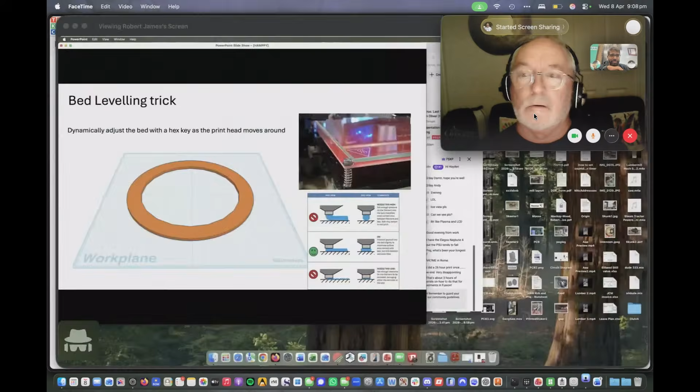Yeah, one of the little tricks I found for you guys is to use a circle when you're leveling your bed. I'm not as lucky as Praj, I don't have an auto leveling printer, so it's all manual. This little screw here, I have to adjust as it's printing. And with the humidity up here in Queensland, my printer is made of plywood. It tends to expand a little bit and contract, so I sometimes have to level the bed maybe once or twice a week.

So as I'm printing the circle, I'm watching how it's depositing the filament. On the top one, it's too high. The bottom one is too low. And you'll actually hear your print head going in a ratchet mode, trying to force the filament through the print head, and it doesn't like it - it goes da-da-da-da-da-da-da. The middle one is what you're aiming for, a little bit of spread from the nozzle tip. You just watch that until it goes around and around and you're happy with it.

Now, the interesting thing is what happens when 3D prints fail, which is something we all have to be prepared for if we're 3D printing.

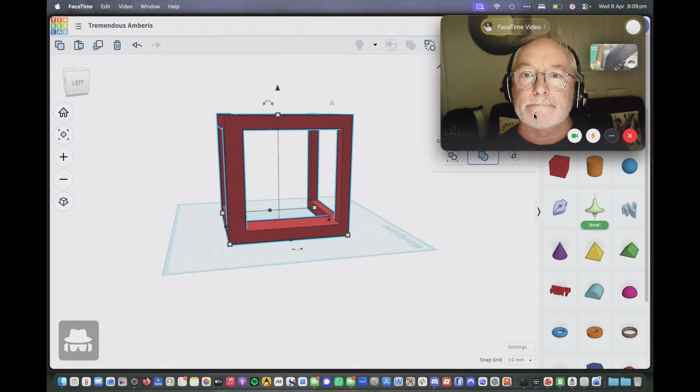You get something that goes by the very tasty name of spaghetti. We saw some examples of that last week. That's the faulty one - just feel it. You basically get spaghetti when your print fails. If you've got one of the modern printers with a camera on it, it'll recognize that your print's gone sideways and stop it. If you don't have one of the modern printers, you've got to go visually check it.

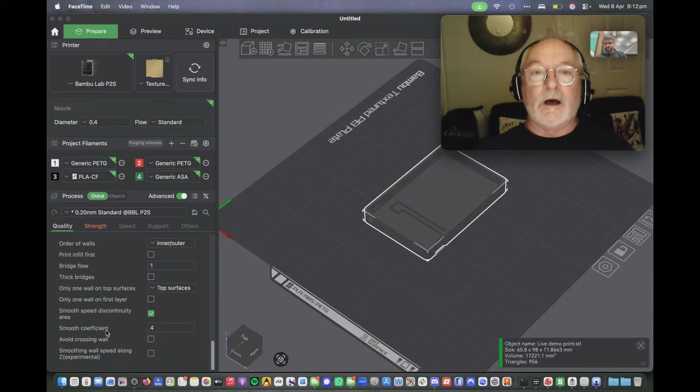How do you change the speed on the first layer? Do you edit the G-code? I use Repetier Host, and you can actually manually control the deposition speed and volume on each layer as you're printing. I do the first layer really slowly, then go back to default at 100%. Here on the slicer you can set the initial layer's speed, and then set the other layers separately.

Yeah, okay. Right. So, okay, cool. All right.

Rob, I'm going to take you over to resin printing because that's your specialty, and given we're running out of time, I'll let you go straight to resin printing and talk about what he does for outdoor resin prints, and the coolest thing, how he uses AI for printing.

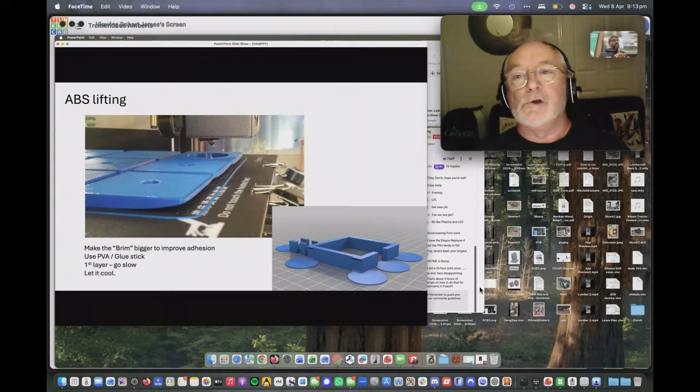Okay, so the dark art. The dark art. Let's shed some light on it. More Sauron art.

So the pros and cons, as Praj mentioned, it can be complicated, but it's about the same learning curve as filament.

Consult your forums, YouTube, and you'll have Praj as a mentor very shortly. He'll be local and on tap. He did look impressed with that one.

3D printing as a service. 24/7. Praj printing as a service.

The last present Praj gave before, and one of the retirement presents I got, and Praj was very instrumental in doing that, was a Saturn printer. It's hardly had a week off in 2 years. It's got a much bigger plate than the Mars.

It's got Wi-Fi, so you don't have to do the SD card or USB transfer using SneakerNet. People know about SneakerNet? Yes. Oh yeah, it's a very 80s joke.

Yep, local file storage. So if you want to repeat a print, you can just go onto the printer and reprint. There's no magnetic flexi plate like the Mars, but I tend to get around that okay.

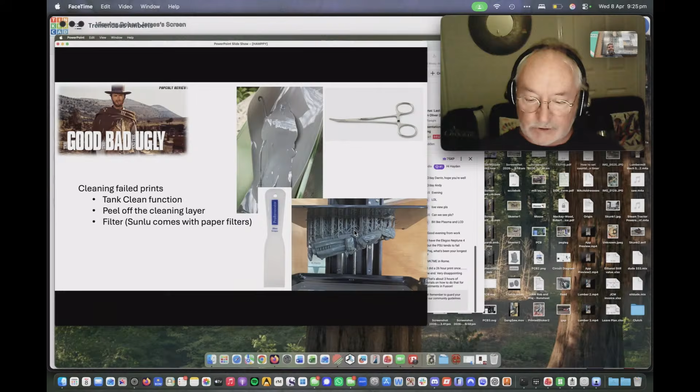I'll just jump out to the website. So, this is me on ChatGPT. I was showing this lady how to do it, and I just said, nativity scene, shepherd standing. As you can see, it's a nativity scene with a shepherd standing.

Okay, then I had to say, nativity scene, shepherd standing on a white background facing forwards alone. You need the white background because when you stick it into the next AI, it doesn't want any background distraction. So here he is, looking at me face on.

Okay, then I went, okay, a new nativity scene, same shepherd, standing on the white background, facing forward, alone, carrying a lamb. Boom, there we go. So we've got a shepherd carrying a lamb.

And I went, hey, I've already got one of those shepherds, I'll get another one. So a new version of a clean-shaven nativity scene shepherd standing on a white background, facing forward, alone, carrying a lamb, looking down.

And I thought, oh, hold on, he's got to look at Jesus. So we just start looking... Jesus.

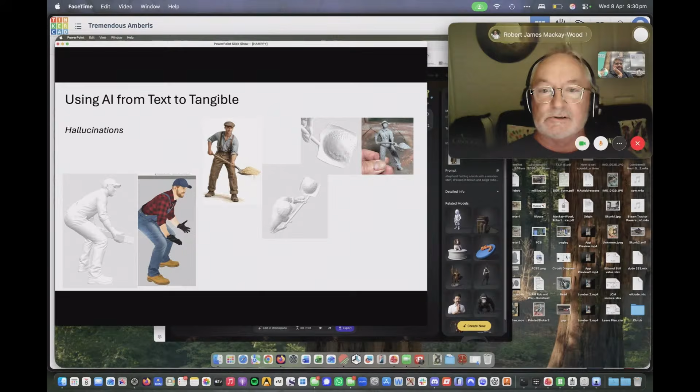So this is my AI team. They are now in my animated lumber mill. And they're all being made with AI. And they're all painted up nicely.

Beautiful, thank you, Rob. Right, there you go, no worries. Thank you, Rob. If you hang around for a minute, there may be some questions.

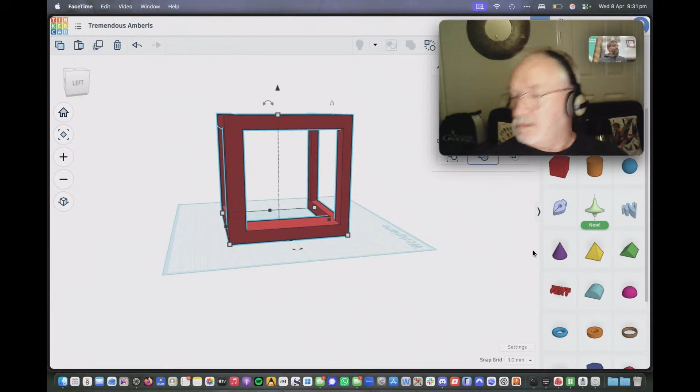Why is PLA a terrible life choice if you were going to use it to build an antenna? It's going to degrade in high temperatures, and it's not suitable to weather outside. So what I'm going to do is give you a PLA antenna mount - don't use it outside.

Is carbon fiber a problem? No, it's not carbon fiber enough for it to be conductive - so at microwaves? Even at microwave. Okay, wow.

But if I were to build an antenna and make myself a little antenna mast topper out of TPU, and hook my antenna wire into that, do you reckon that's going to affect my antenna at all? No. Gold star, why? It acts as a dielectric.